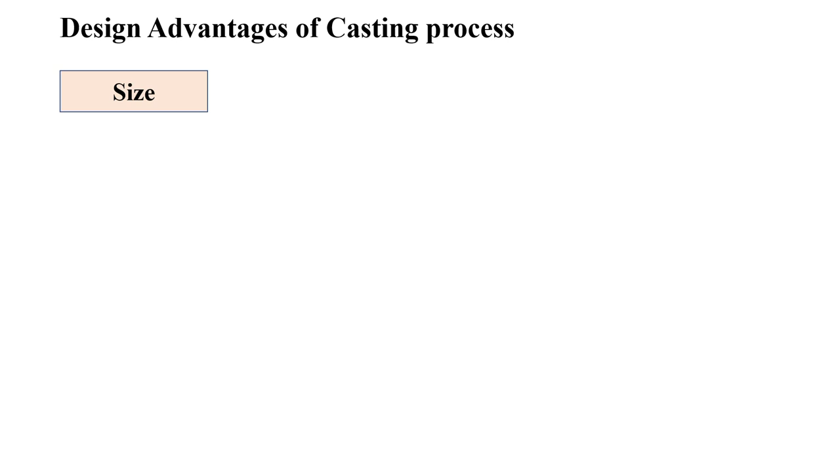So I will start from the design advantages of the casting process. There are many design advantages, classified on the basis of different criteria. First, on the basis of size, the casting process is able to produce any size of casting in one piece, even massive objects in a single piece.

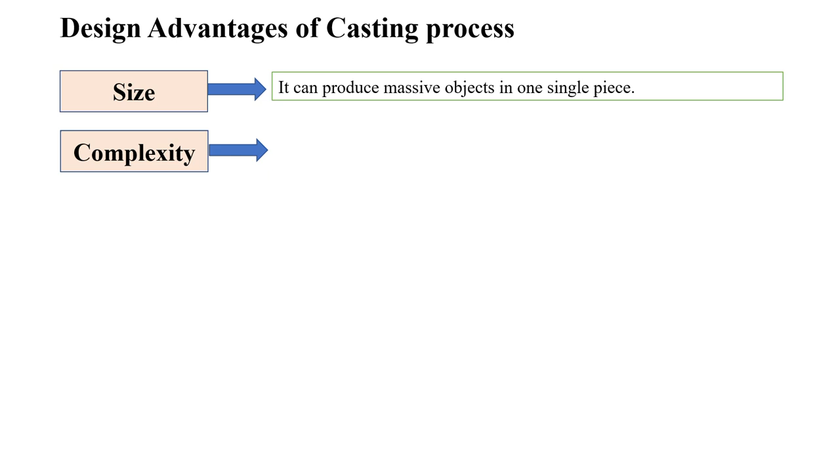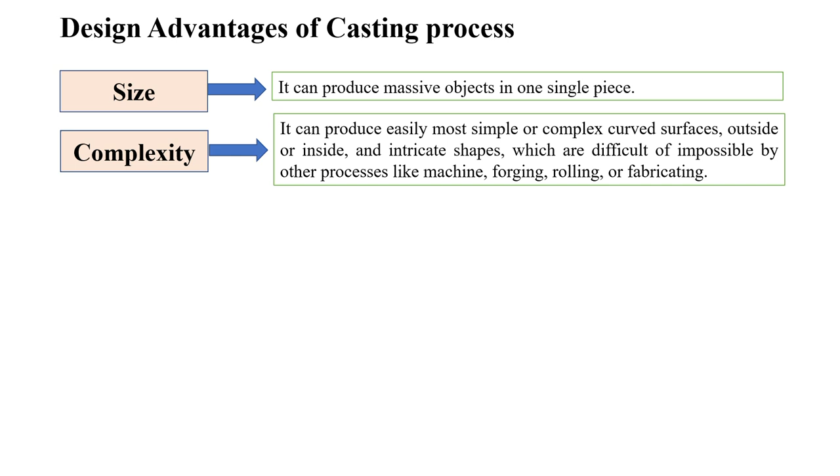On the basis of complexity, the casting process is able to produce simple or complex curved surfaces, outside or inside, and intricate shapes which are difficult to produce by other processes like machining, forging, rolling and fabricating.

Casting process is also able to produce castings of exact weight, which increases efficiency in transportation and saves transportation charges. This makes the process economical because producing castings of exact weight results in very little wastage.

Production of prototypes: it can produce a model or prototype for new designs, which can be easily produced by the casting process.

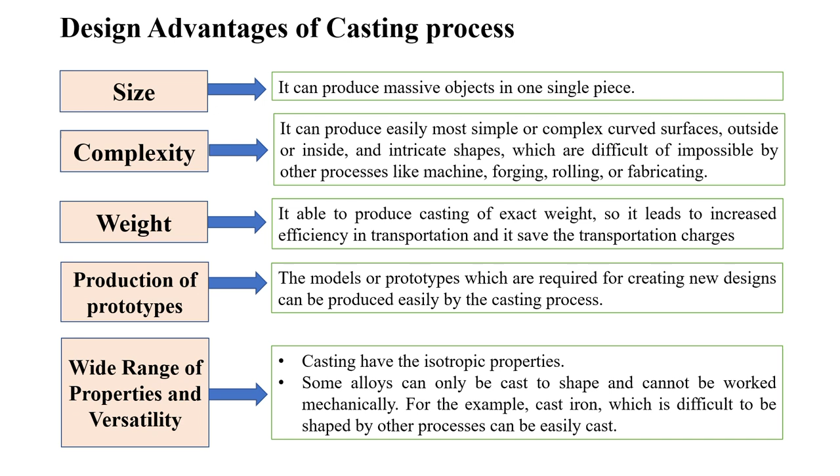Casting process is also able to produce a wide range of properties and versatility. Castings have isotropic properties, and some alloys can only be cast and cannot be worked mechanically. For example, cast iron can be cast but not shaped by other processes, so it is easily cast.

Other advantages include low cost. This process is very economical as compared to other shaping processes.

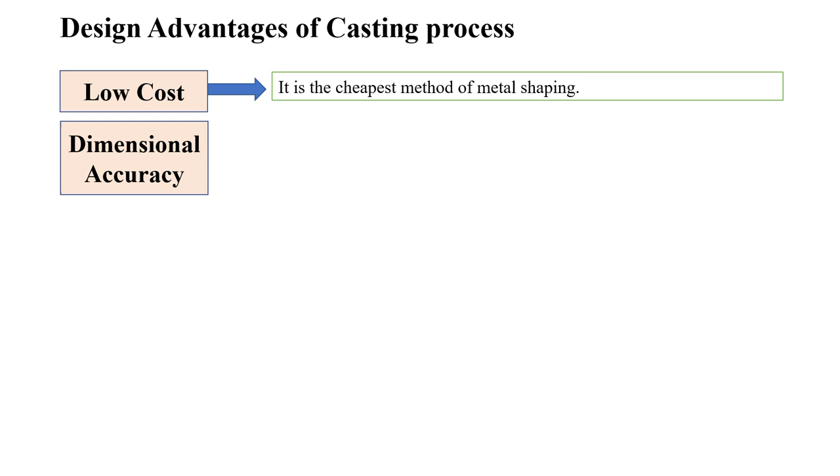Dimensional accuracy of the casting process is very high. It can achieve fairly close dimensional tolerances by choosing the proper type of molding and casting process. Tolerances of plus minus 0.1 mm can be achieved depending on the cast metal, the casting process, and the shape and size of the casting.

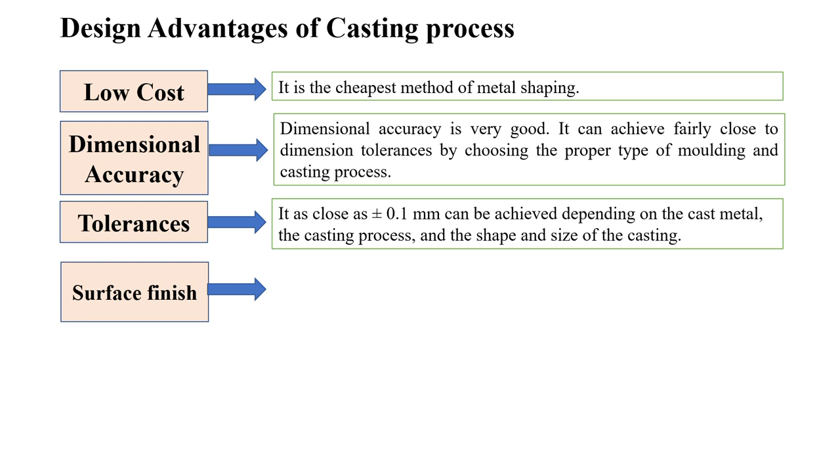So casting process has high dimensional accuracy, and the surface finish of the casting process is very high, which can in some cases be directly used for application immediately after producing the shape by casting, requiring less additional surface finishing. It has better surface finish compared to other processes.

This surface finish can also be controlled, and it can vary from 5 microns to 50 microns.

Versatility in production: it can produce any type of casting. Metal casting is adaptable to all types of production. It is suitable for jobbing work as well as mass production. Any metal can be used for casting.

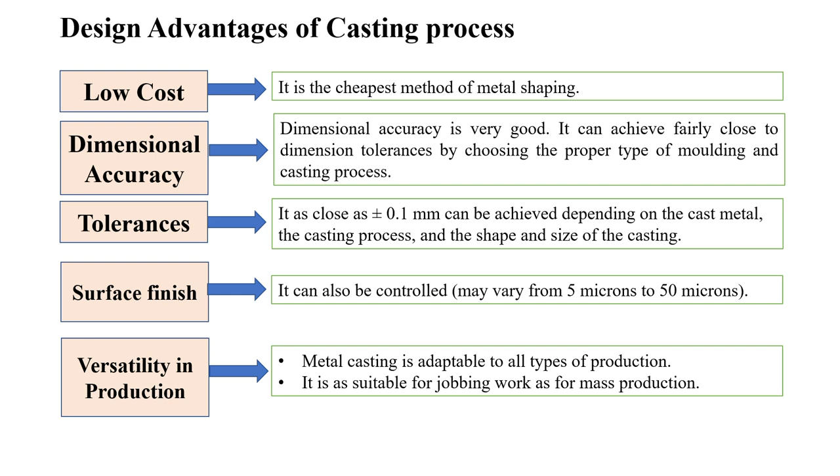For casting, the metal should be in molten form, so we can easily cast it.

There are also some metallurgical advantages of the casting process. First, fibrous structure: wrought metal has a fibrous structure mainly due to the stringer-like arrangement of inclusions of non-metallic impurities.

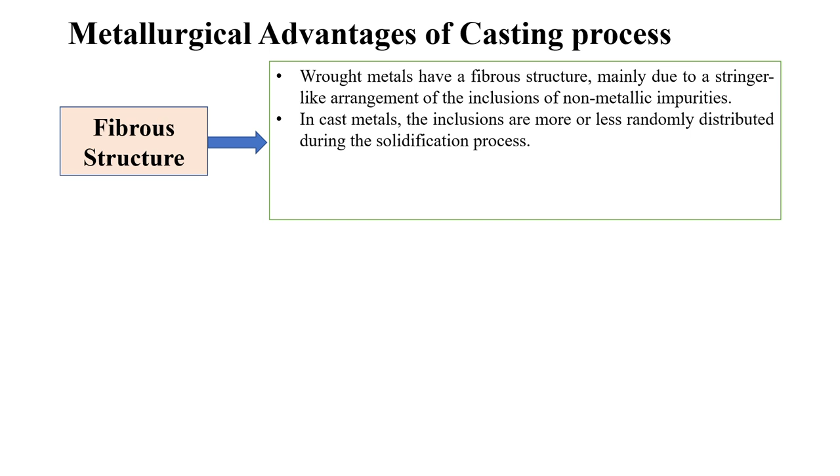In cast metals, the inclusions are more or less randomly distributed during solidification. When wrought metals are worked, the inclusions are strung out in the direction of working, meaning all the inclusions are elongated in the direction of mechanical working or the direction of applied forces.

Grain size: although mechanical working of wrought metal causes breaking up of coarse grains and promotes fine grain size, many castings have grain sizes not very different from those of the wrought form. Most non-ferrous alloys retain the grain size attained during freezing of the casting.

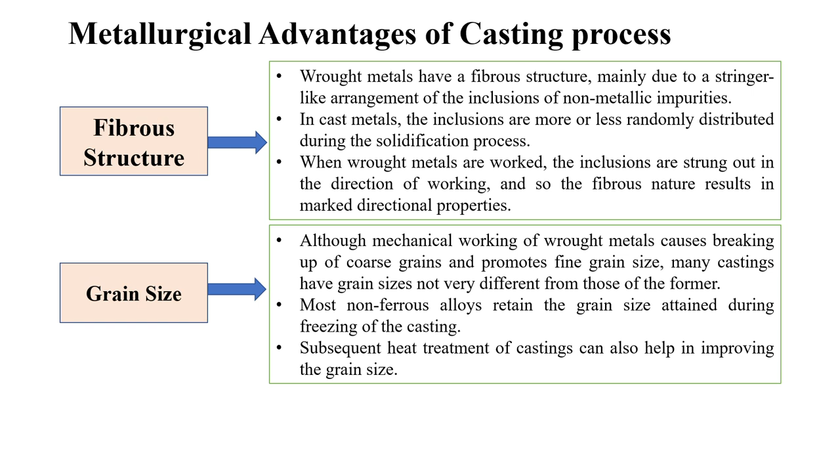Subsequent heat treatment of the casting can also help in improving the grain size, so grain size is better in the case of casting process as compared to mechanical working.

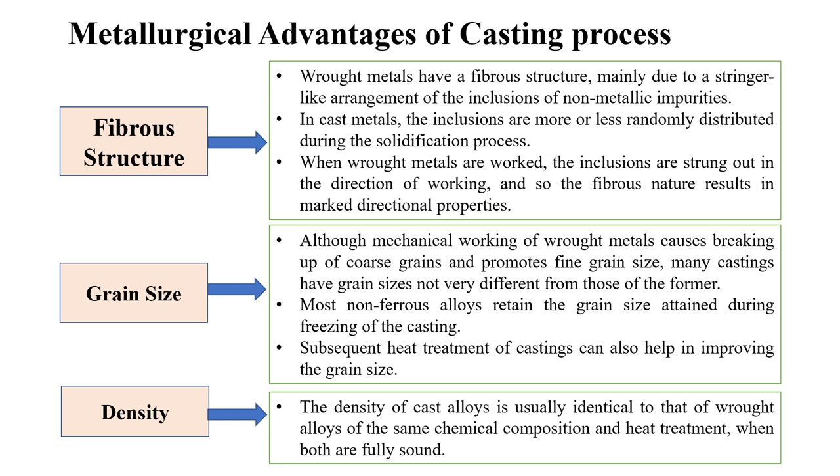Density: castings of the same composition and heat treatment have identical properties, and their density is also identical to that of the wrought alloy of the same chemical composition and heat treatment.

There are also some limitations of the casting process besides its applications. The dimensional accuracy and surface finish achieved by normal sand casting would not be adequate for final application in many cases, because some sand particles at high temperature diffuse into the casting, so the surface may become somewhat rough.

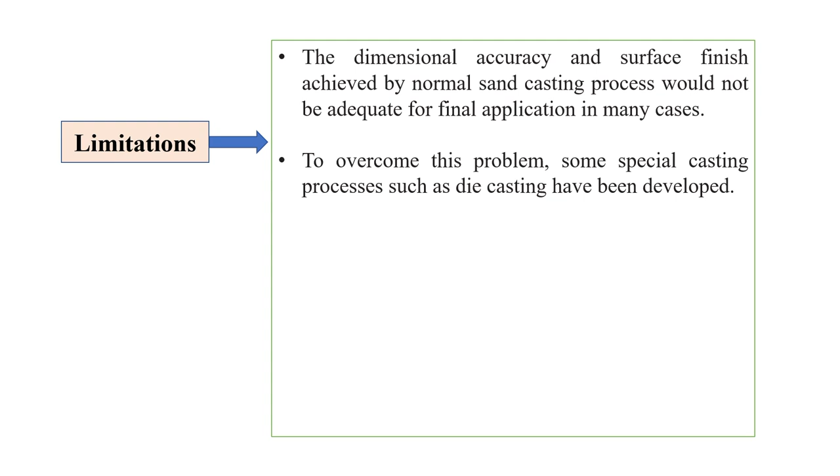This problem can be overcome by using some special processes such as die casting. Sand casting process is labor intensive to some extent.

Therefore, many improvements are aimed at it, like machine molding and foundry mechanization. Some processes like ramming and removal of pattern can be mechanized to decrease labor and make the operation economical.

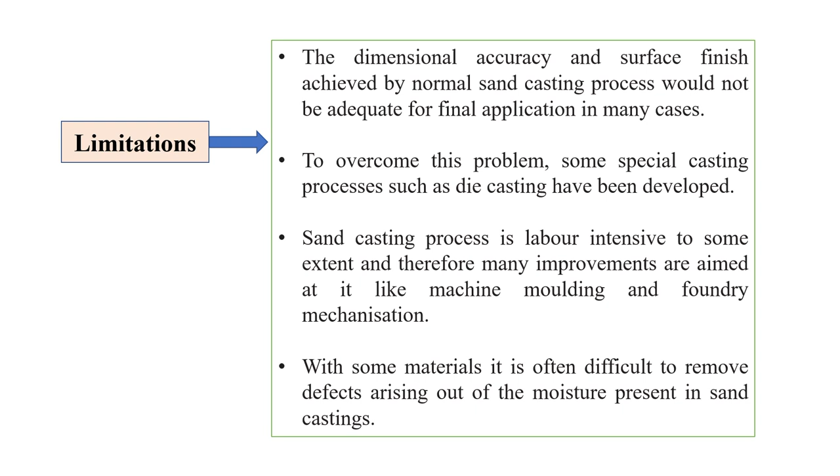With some materials, it is often difficult to remove defects arising out of moisture present in the sand used for casting.

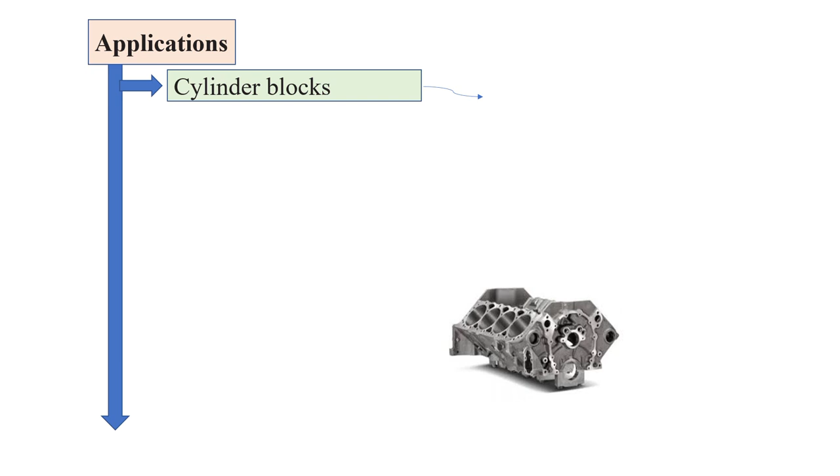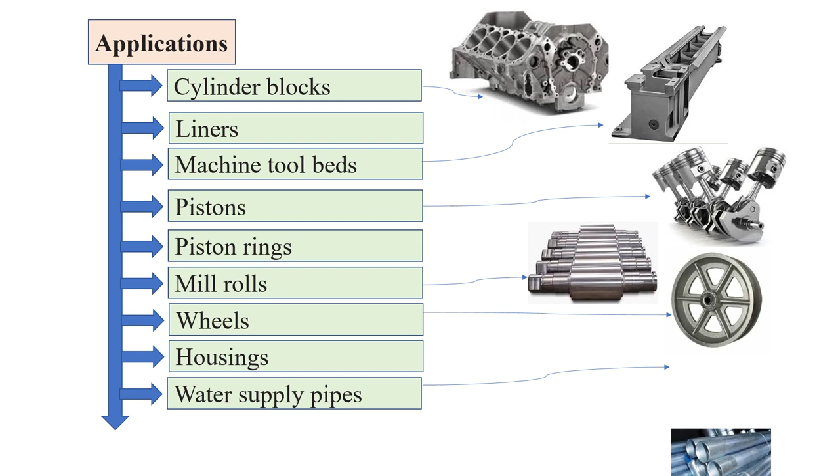There are many applications of the casting process, like cylinder blocks, liners, machine tool beds, pistons, piston rings, mill rolls, wheels, housings, water supply pipes, bells, and other special items produced by the casting process.

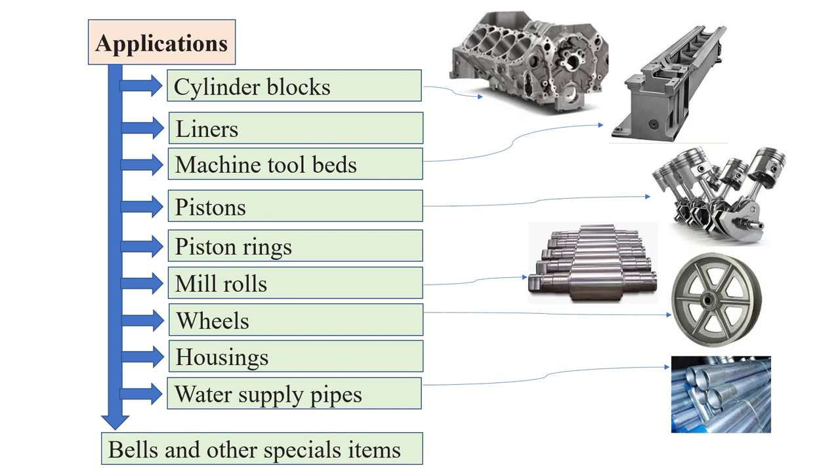The casting process is very versatile, able to produce many types of casting items which are used in daily life and in many applications.